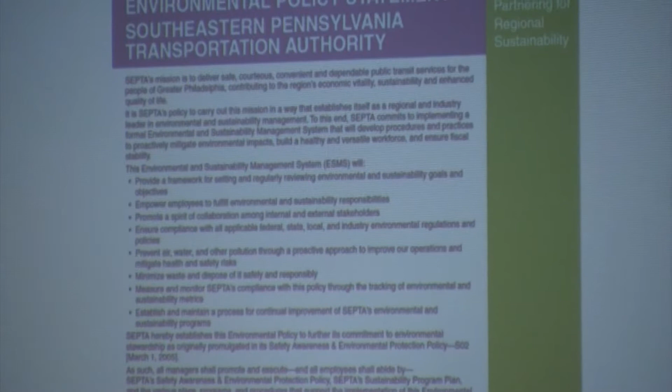So our group, SEPTA, was given the daunting task of replacing Crum Creek in 12 weeks. We have an environmental policy signed by every senior leader in the organization. We want to make sure that we anticipate any environmental issues, we consult, we make sure that any remediation efforts that are necessary are done. And we want to leave the place in any condition post-construction better than it was prior to construction - we want to leave everything and put it back in the way it's supposed to be.

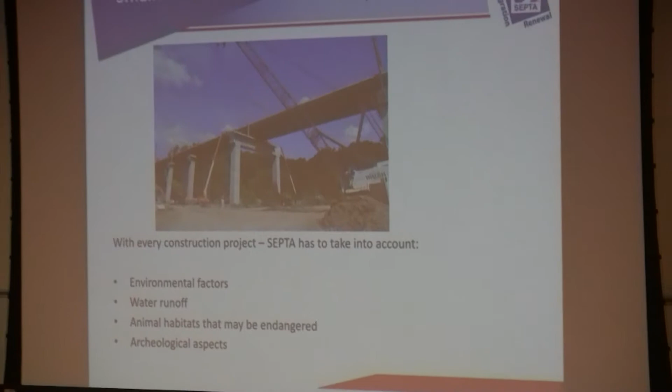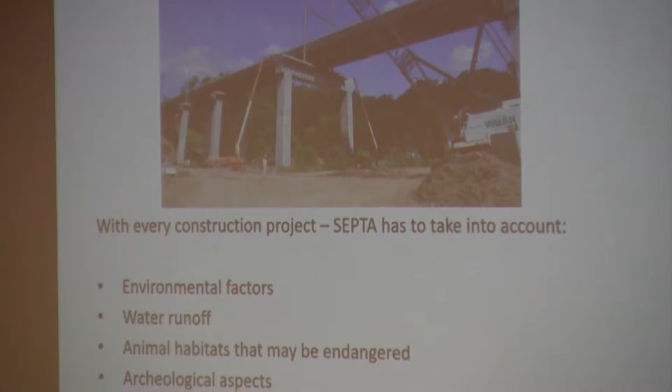So every time we do a construction project, we have to take into account a number of different factors. Tom is going to talk about water and water runoff and environmental factors a little bit longer. Animal habitats and endangered species - anybody think about that when you replace a bridge? And archaeological aspects of what we do.

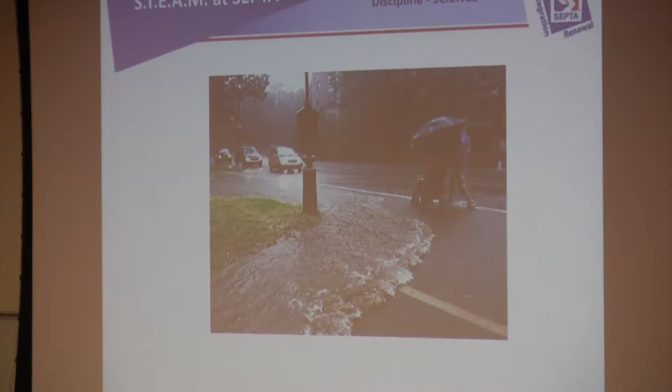Let me see if I get this. So, water runoff is something we all have to consider.

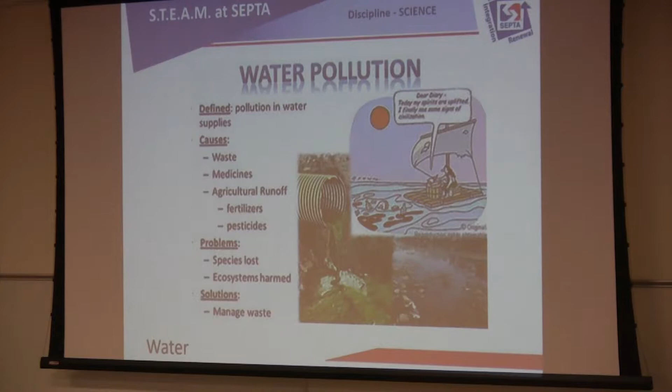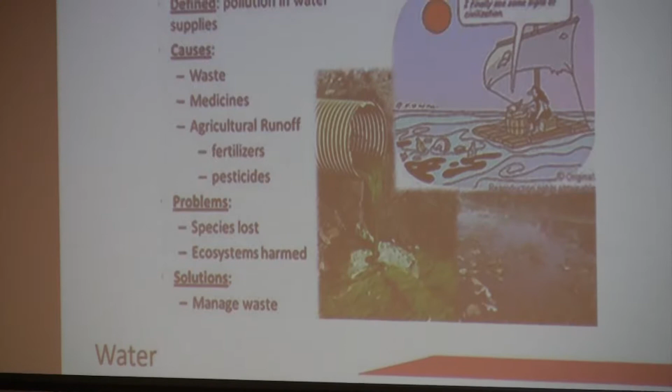Gasoline running into a drain, used motor oil running into a drain, is not going to be very beneficial to the public. It's not going to be very beneficial to the environment. It's not going to help future generations as far as environmental safety is concerned. So we've started to adopt a number of green principles.

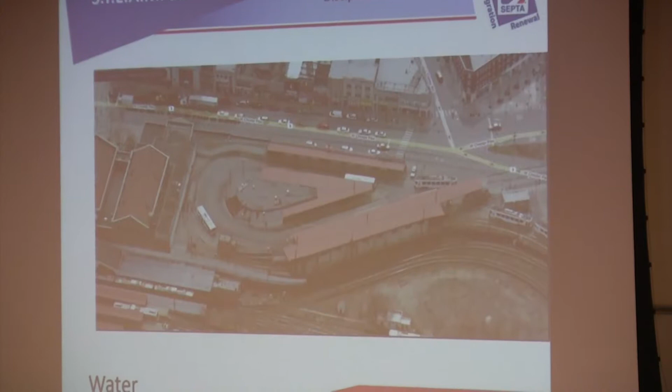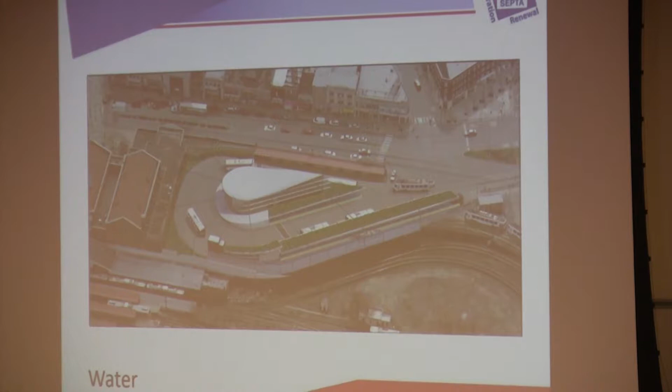So we are using them to control water flow, and also to help clean water, and make sure that the water runoff is limited. That's an easy example of what a green roof is and how you put it together.

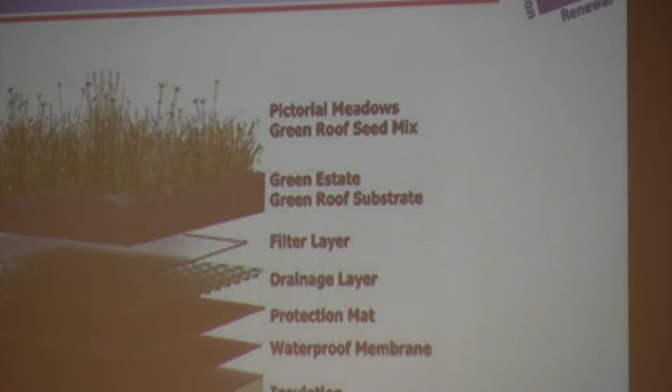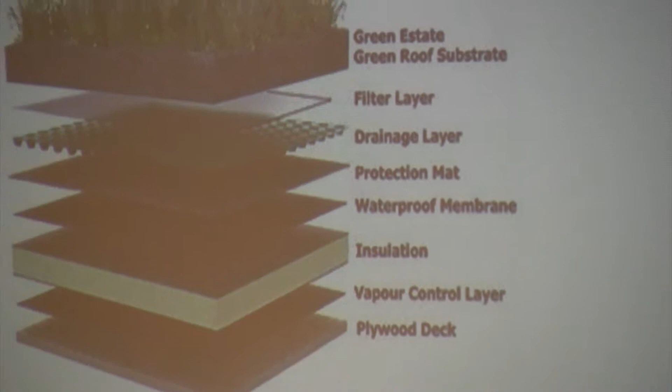There are a number of buildings in the five-county area that a green roof can work on. In Philadelphia alone, there are, I think, something like 50,000 houses. Think about all the row homes and the insulation factors that went into that construction post-World War I - flat roofs, not a lot of insulation. Green roofs are a technology that can actually help cut down energy bills.

And there are actually federal grants going on right now in Philadelphia to add green roofs to a number of places with new construction. There's a lot of gentrification going on in Fishtown and Port Richmond, and a lot of millennials are moving into Philadelphia, into old established neighborhoods. A lot of green roofs are getting put up.

We are trying to use green roofs in as many structures as possible where it's functionally capable, and it's something we continue to consider because of the environment. We want to lessen the environmental impact of our former property post-construction.

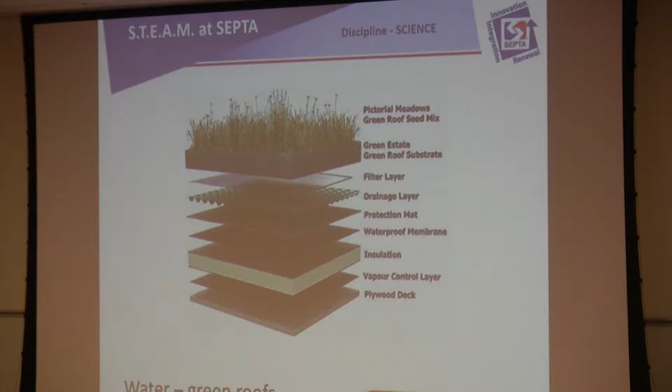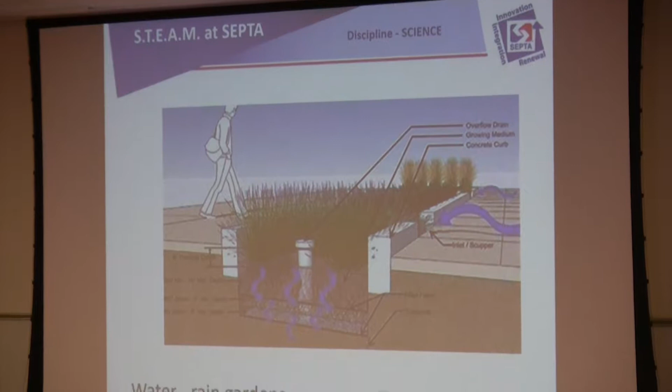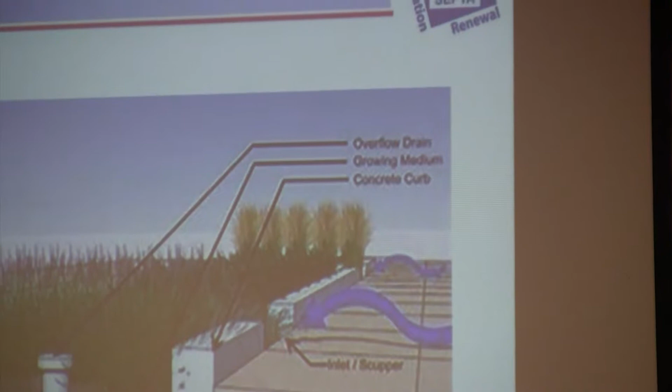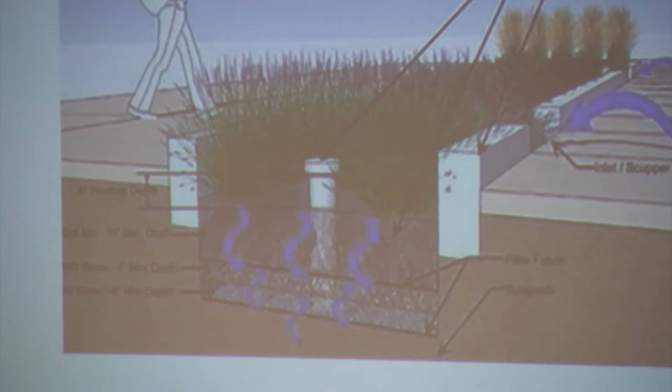Rain gardens - you're going to see a number of spots in our bus loops and other locations that contain rain gardens. This is going to trap water, keep water runoff to a minimum, and also keep runoff and any chemicals to a minimum.

Everybody loves turtles - there's nobody here, I think, that can say anything wrong about turtles. If you've had turtle soup, it really isn't turtles, it's different fish now, but in the old days it was. We had to consider the breeding grounds and the migratory patterns of the red speckled turtle when we did Crum Creek. We had to have environmentalists come in and make sure that our construction did not impact their breeding grounds or migratory paths.

We brought people in, they did the environmental study. We had to make sure that we were living within the boundaries of their habitat, yet at the same time get our work done.

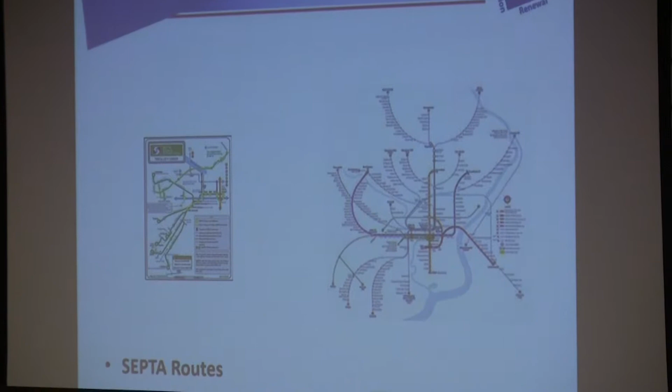We have a new piece of technology that's been rolled out now, and it's going to take us some time to get acclimated to. If you look at our rail path and the trolley path in Delaware, the routes, there's a lot of different pieces there. Up until recently, this was our basic method of payment: tokens, money, and passes, for an estimated 1 million people a day. But where are they going, what are they taking, and what time of day are they riding?

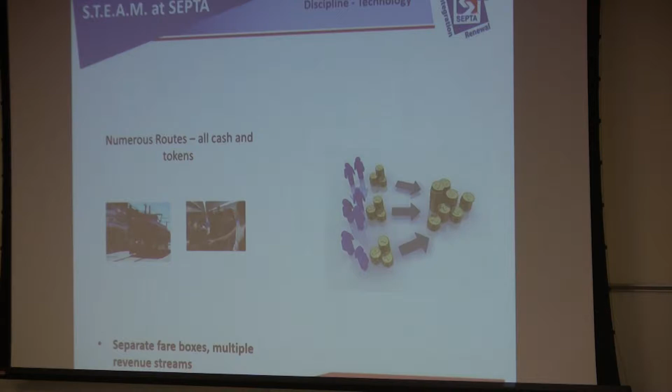We have numerous routes, all cash tokens and fare cards, separate fare boxes, multiple revenue streams. How are we able to capture our customer flow? That's when we get the SEPTA key. SEPTA key is a fare instrument that's loadable - it is a one-stop shop for a number of people to use while they ride the system.

Eventually, it will be on all modes of transportation. Rail's taking a little bit of time to work out, there's also some other pieces we're trying to work out with it, just like any other system you implement, especially because we're multi-mode. So we have the rail, we have the subway - we're not just trying to roll this out on the subway, we're doing buses, trolleys, regional rail, and all the service routes.

Simply by going in and using that and tapping, we're able to get an electronic record of a fare when somebody spends money to go ride. And by the way, the fare's $2.50.

What can you buy for $2.50 these days? You can get a candy bar. You can't get a power bar, they're about $2.99, up to $5 in Wawa. But this is for a loadable fare instrument, $2.50. You're still keeping the price at $2.50. And seniors ride for free.

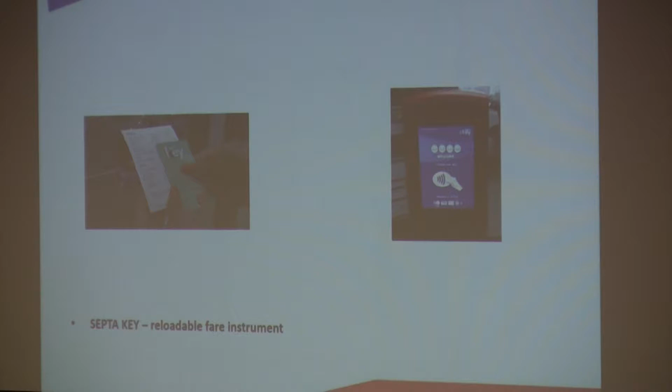We have new ID cards with their pictures on them, so people who are seniors can ride for free.

So advantages: it's an electronic transaction, it gives us a permanent record. Somebody drops a token in, it's not a permanent record. The token goes in, we don't know who the token went in by, we don't know what time of day it went in. All we know is when we empty the box, it's there.

The single fare instrument, we can get there. We may never get there because there's always going to be people who have to use money. There are going to be people who are unbanked, who do not have banking accounts. We're trying to work through that situation now.

The fares are calculated automatically, though, so we know automatically when you switch modes, when you transfer, we don't charge you $2.50 twice.

Trips by type, trips by individual. Seniors have their own cards, and we have special and federal programs. People with disabilities, they have their own cards.

So it provides answers. How many people are really riding? We'll estimate 1 million people a day, but I can't guarantee you it's 1 million people a day. And what routes are they riding? And what time of day? Where are they going?

We had a conversation real quick this morning about this campus and the possibility of a connection to your other campuses. There's evidently a bus from 69th Street that comes here but does not interconnect between the campuses.

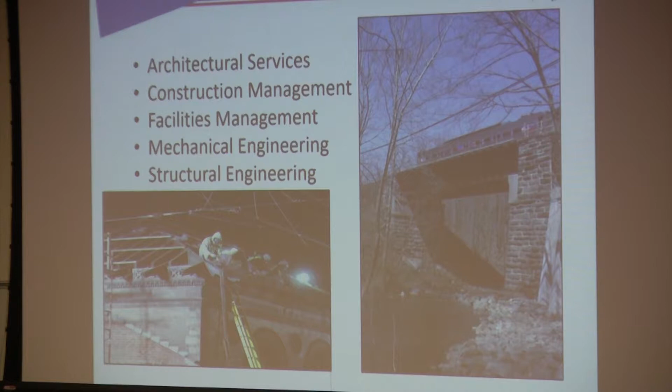Facilities management - like I said, we have a lot of buildings, a lot of shops, a lot of depots that have their own facilities, essentially their own workshops, plus all of our stations, all of our elevators and escalators. Those all fall under the Bridges and Buildings Department. Our mechanical engineering group and also our structural engineering group all reside within our Bridges and Buildings Department.

Under our civil group, like I said, they handle site layout. Whenever we're designing a new station or retrofitting an existing property, our civil engineers come in and re-lay out the property to make the best use of space. They handle all of our stormwater management on the system, which is a big deal. As Dan mentioned before, stormwater management is a huge issue, not just for SEPTA, but for the entire region, so our civil engineers really lead the front in dealing with those issues.

Third-party coordination - because we're such a vast organization, we have people, companies, other entities that want to do work on our property or adjacent to our property. All that work needs to be coordinated to make sure that they're not impacting service, they can still get their work done, and it's all done in a safe manner. So all that really goes to our civil group.

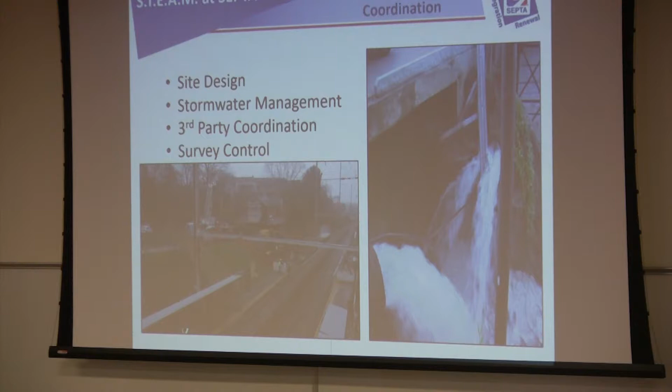And lastly, survey control. We essentially have our own survey crew, and we have to go out and lay out benchmarks, stake out property lines. We can do a lot of those tasks in-house.

Our communications and signals group is responsible for our entire fiber optic network. We have a completely independent fiber optic network that runs through all of our outlying locations, all of our stations, all of our yards, and they manage and oversee that. They're also responsible for all the communication systems in all the equipment themselves, so trains get the proper signals and can proceed in a safe manner.

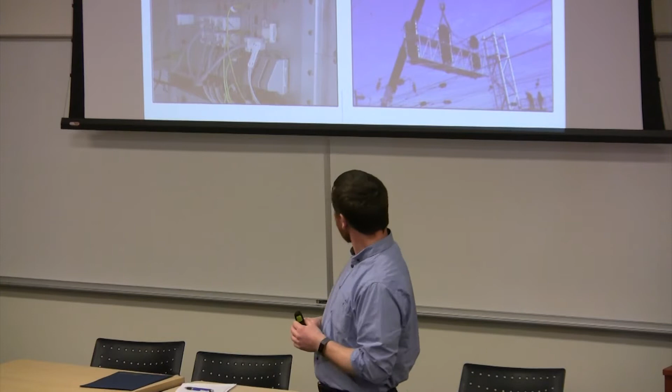All that's handled by our communications and signals group. If anyone's been at a passenger station, they handle all of our audio and visual announcements, all our display boards, equipment testing, and third-party support all falls under our communications and signals group.

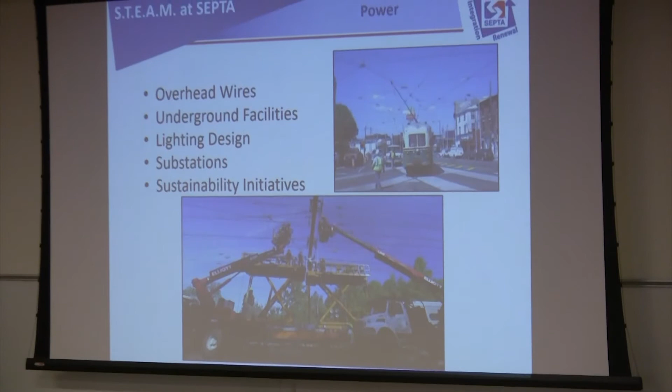Our power department - if anyone's ever ridden on a train, ridden a trolley, ridden the subway downtown, they all need power to operate. That's what the power department is, my department. We're responsible for getting all the power, medium and low voltage, out to our facilities and equipment. We're responsible for all of our lighting at our stations, our overhead wires, and our underground facilities.

Something a lot of people don't know in the city, back a long time ago, we had trolley routes on pretty much every city street, and we still have a lot of those facilities in the ground now. Even though we're not actually running service, we still have active high voltage cables in the ground. So whenever the city is digging up the street, repaving, or putting in an ADA accessible crosswalk, they need to coordinate with us to make sure that work can be done in a safe manner.

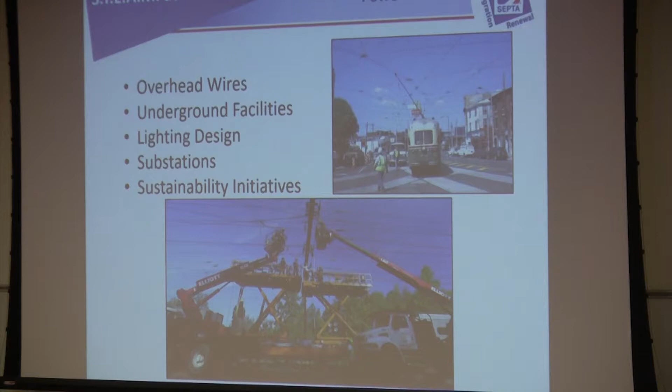Also, our power usage - we're PECO's largest customer for the entire region, because everything we do requires power. So if we lose PECO, we're pretty much shut down. And then also, something that kind of gets lost in the shuffle sometimes are our sustainability initiatives.

We really spend a lot of time and effort looking to see if there's a better way of doing something. Are there greener technologies we can be incorporating, whether it's solar or wind? We're doing a lot with regenerative braking, where we're capturing energy from braking trains and putting it back out onto the system. So yes, it's bottom line for SEPTA, which is good - we pass that on to our riders - but it's really the right thing to do. As an engineer, it's our responsibility to look out for the environment and do what's best, so it's nice that we have engineers specifically focused on those responsibilities.

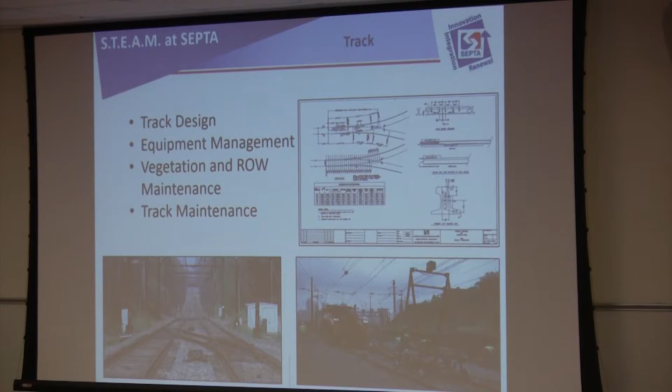And then lastly, of the main engineering groups, our track department - so much math, that's why I don't do it. But pretty much any of the track that's out there, all the design work, all the renewal, all the rehab, all that has to be designed to very, very strict tolerances.

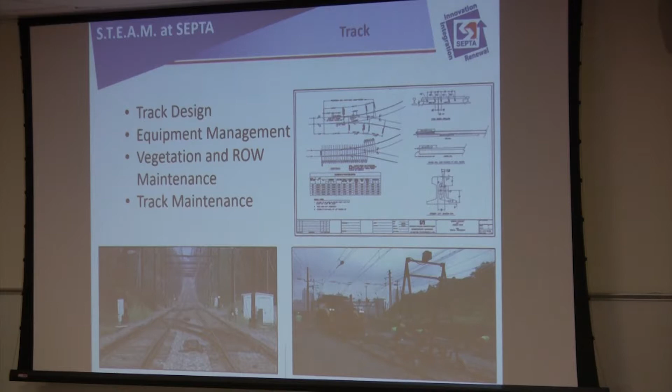There are federal requirements, especially on the railroad, that they have to meet. So our track engineers really spend a lot of time and effort making sure that everything's in compliance and done properly. Another big one is right-of-way and vegetative maintenance.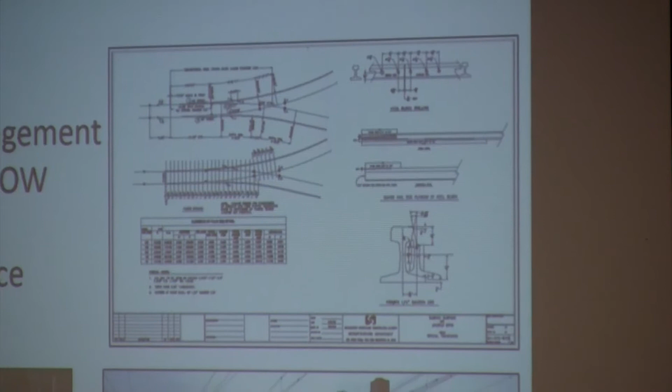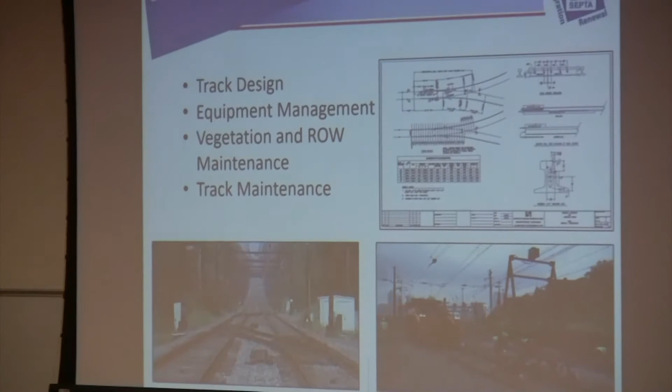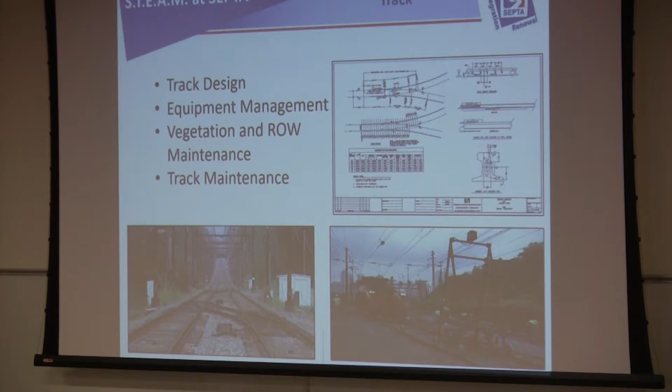Most of our facilities, again, out on the railroad and trolley lines - the 100, 101, 102 trolley lines to Sharon Hill - in most cases, they're vegetated rights-of-way. So we have a continuous problem with trees coming down, getting into wires, impacting service. Like in the winter when we've had some of these ice storms, you see trees out when you're driving with ice in the branches blocking the roads - we deal with that on almost a daily basis. So in the winter we have crews that pretty much just go around knocking ice or cutting down branches, just so we can maintain some level of service.

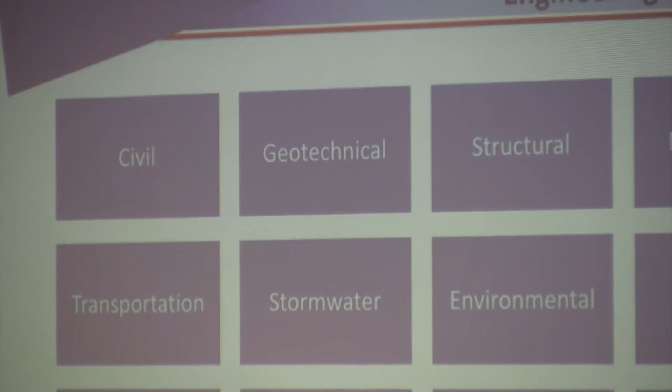So this is just a short list of a lot of the different types of engineers that we employ here. We're not going to read them all to you, but what's really great about SEPTA and engineering is there's a place for everyone. We do so many different things, so many varied disciplines, that we have engineers of all these types on staff, which is great.

So what do we do? We're project designers, like I talked about. We're technical resources - as I said, we fall under engineering, maintenance, and construction. So our engineering staff is really a technical resource for our construction and maintenance forces, making sure we're answering questions, solving problems that they have, and really just being an asset to the organization.

So I'm going to go through a couple examples of projects here, just some of the varied things that we do and that we're responsible for.

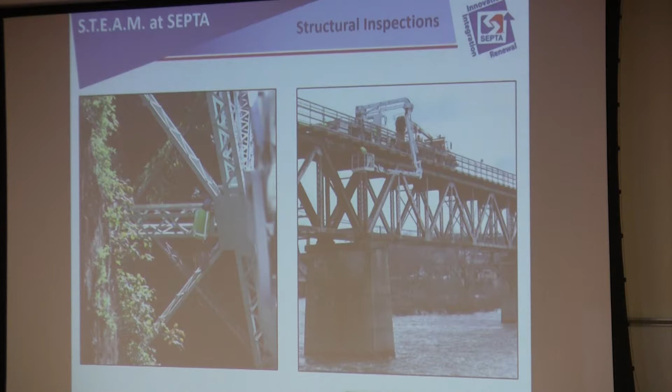This photo is not as dark on this screen, but again, this is the concrete bridge that Dan mentioned.

On the left-hand side is the original bridge built in the late 1800s. On the right-hand side is the new precast concrete bridge that was built. As Dan said, it was built adjacent to the old bridge so we could maintain service. Then under a scheduled outage where we had to suspend service, they demolished the existing bridge and slid the new bridge in. Like Dan mentioned, you can check it out on YouTube, they actually did a time lapse of it. It went super quick, but it's phenomenal to see from an engineering standpoint.

Here is a unique solution to a very specific problem. Normally, like PennDOT or the city, they'd just take the bridge out, kill it for a year and a half, and people can go around. We don't really have that luxury.

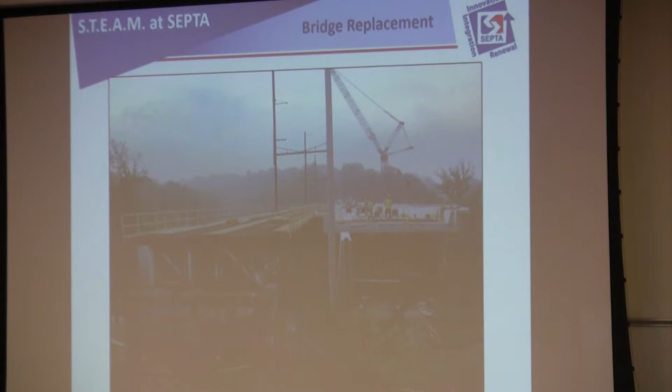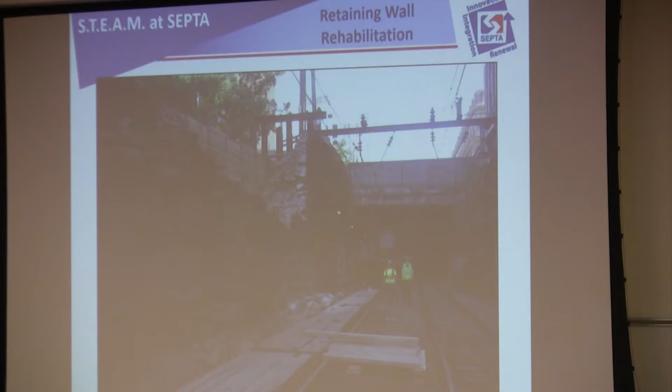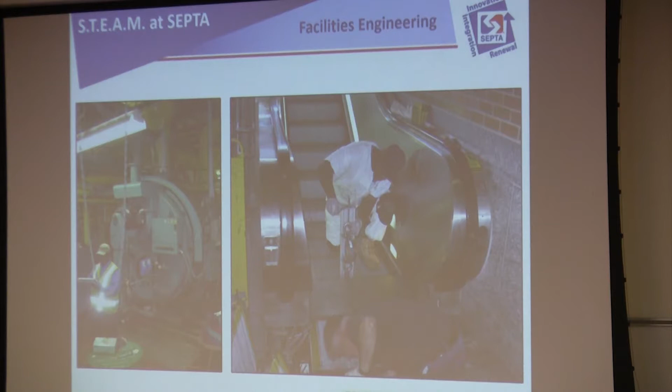Facilities engineering, like I talked about, all of our facilities have generators, boilers, mechanical rooms, elevators, escalators. It's a massive amount of facilities that our mechanical engineers are actively involved in, whether it's designing new equipment to replace old, outdated equipment, or working with our maintenance forces to maintain the equipment.

Tunnel construction. This is Malvern Station on the regional rail line, the Paoli-Thorndale line. We bored a new pedestrian tunnel through a railroad embankment while you had 4 tracks of Amtrak territory, active high-speed rail above it. How do you do that? Very carefully and slowly, but there is a way. If anyone's ever been out there, you'll see what I'm talking about. It's my home station.

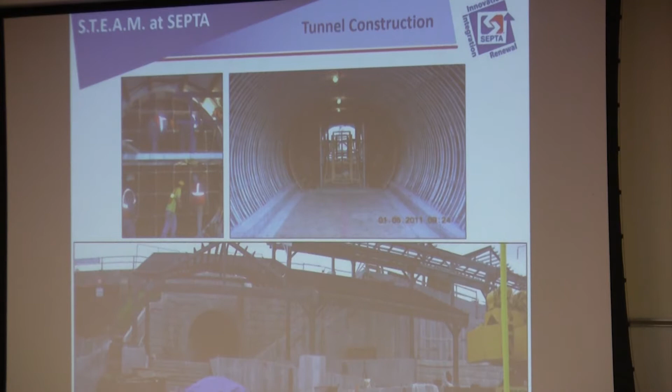Like we talked about, this was done in probably a 3-day weekend, probably either Memorial Day or Labor Day, where the precast concrete panels were on tractor trailers, ready to go. After the last train on Friday night, we would cut rail, remove the sections, dig it all out. The footers in the stream bank would have already been installed ahead of time, and then the crane just came in and set the sections, filled it back in, put the track panels back in, welded it back up, and we were back up running service probably Tuesday morning.

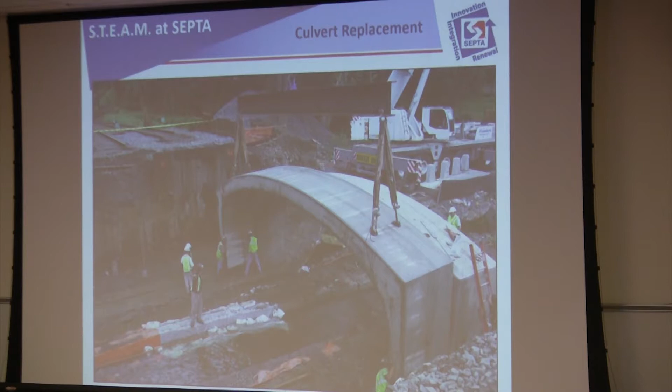Rail's usually the low point. We have swales on either side. That's where the water was accumulating because everything slopes down to us. Until that water receded, they were just stuck taking photos.

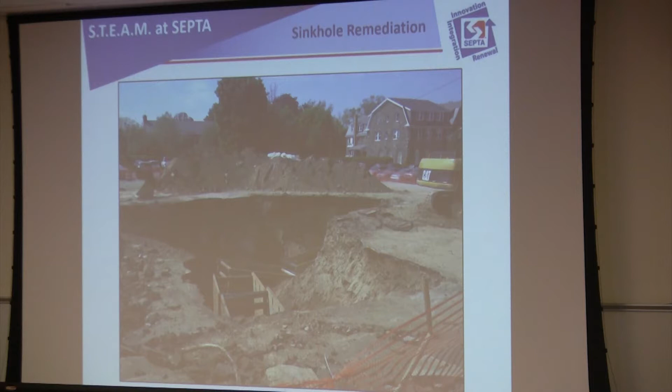And put the parking lot back together. The whole time this is happening, we're impacting customers. Our parking lots aren't big enough anyway to take out probably half or 3/4 of it while we fix this over a week or two span. It's not a luxury we have, so, but sometimes you have to do it.

Substation construction, we're essentially a utility. The amount of power we use is just bananas. So a lot of our equipment is, again, like David said, from the late 1800s, early 1900s. We actually have to fabricate a lot of parts from scratch by hand because it's no longer made. It's probably older than we are. So we're really going through now and overhauling a lot of our equipment, getting new state-of-the-art modern equipment. So with that comes reliability and redundancy.

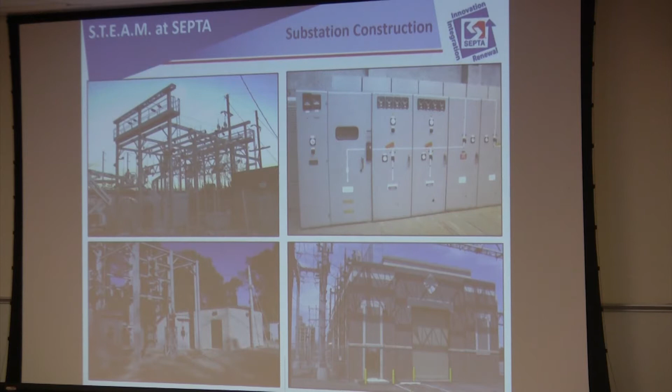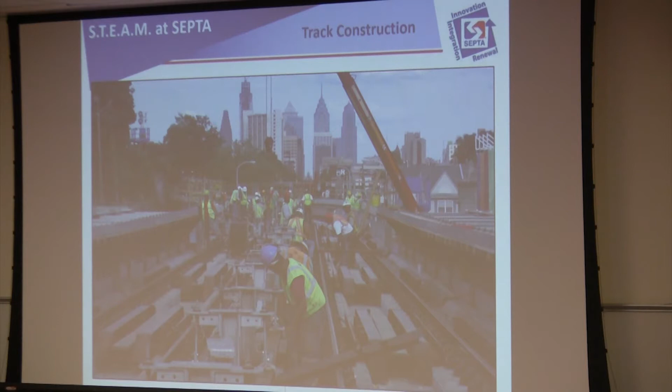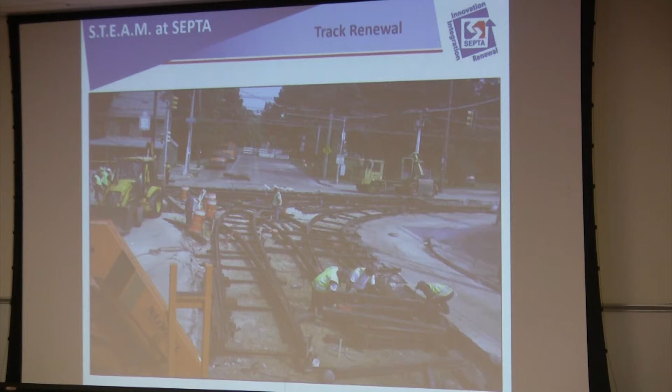And then the last two, long-range planning. Everyone thinks, oh yeah, we just sit at a computer and draw stuff. We've already been in meetings. We've got 5, 10, 15, we're thinking 20 years out for a lot of our projects. So King of Prussia Rail Extension, if anyone's familiar with that, kingofprussiarail.com, something like that, check it out, it's really cool. Paoli Transportation Center down the city, a new station out of Villanova.

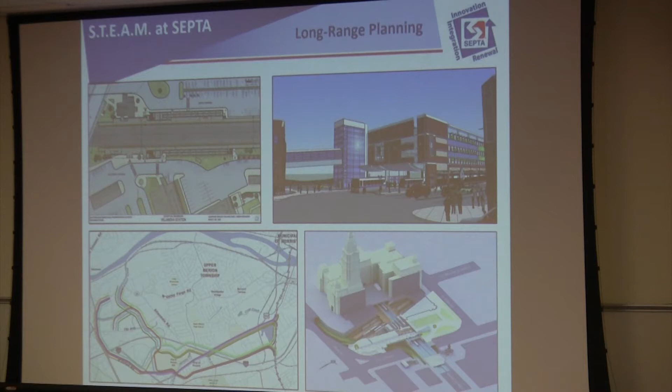These are all massive projects that require a ton of money, but a lot of planning. But in the end, they're good for our riders, and good for the communities that they're in.

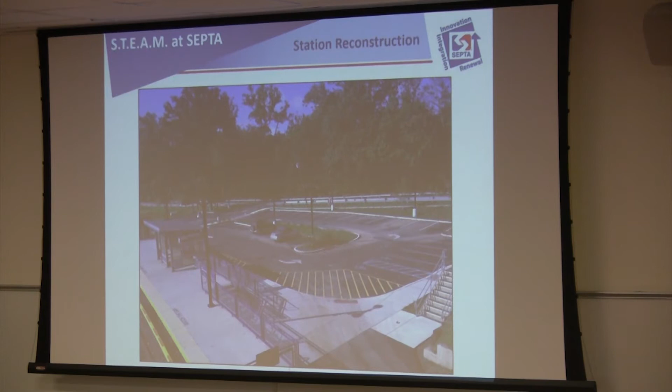Lastly, station reconstruction. If anyone has ever been out to Ardmore Avenue Station on the Norristown High Speed Line, it's right next to Merion Golf Course, where the US Open was in 2013. This station, from design to construction, was less than 2 years, once the golf course got determined. We increased parking, landscaping, added stormwater features, new lighting, ADA accessibility, and a complete overhaul of the station, completely built in-house. If anyone's ever been out there, check it out. I'm actually the engineer of record on this. I signed and sealed these drawings myself, so I'm kind of proud of it.

All right, that's all I got.

Thank you, Tyler. I remember that shot you took at me. Yeah, surprised to hear a little bit. Yes. So we've got a couple of minutes left, and I want to get through this as quickly as possible. Not that it doesn't deserve attention. Where are my artists in the room?

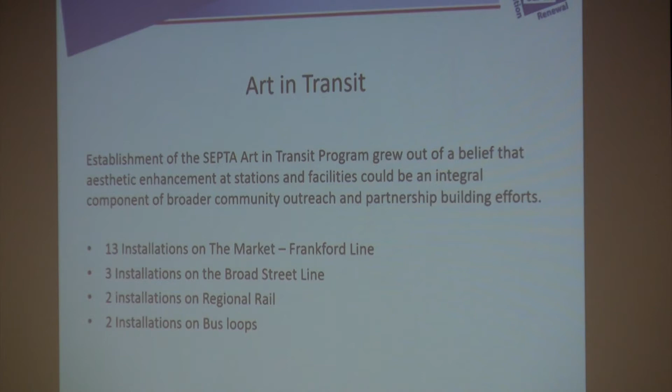The program just started. If you go and look at our website, there's live music, buskers, the Philadelphia Orchestra, everything from a middle school play or choral group, all the way through members of the Philadelphia Orchestra playing during rush hour, in the morning or in the evening.

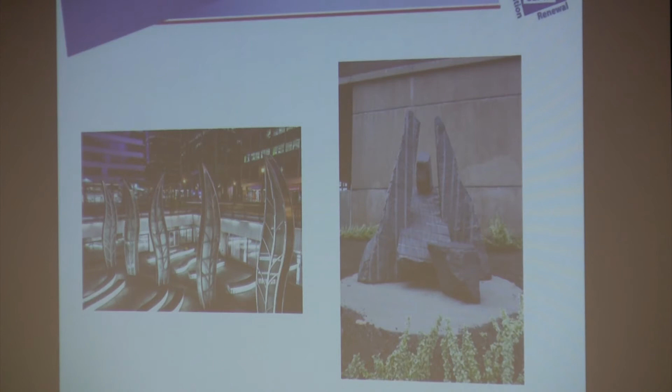This is Suburban Station at night, an open courtyard with flames. And this is a rock sculpture up at the Norristown Transportation Center. This is an installation out in West Philadelphia that an artist came up with - I think it's really neat. It's flowers and flower petals, and it actually covers a quarter of the block. It beautified the neighborhood.

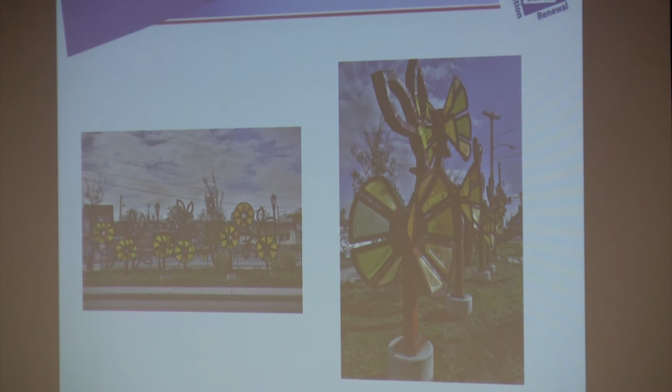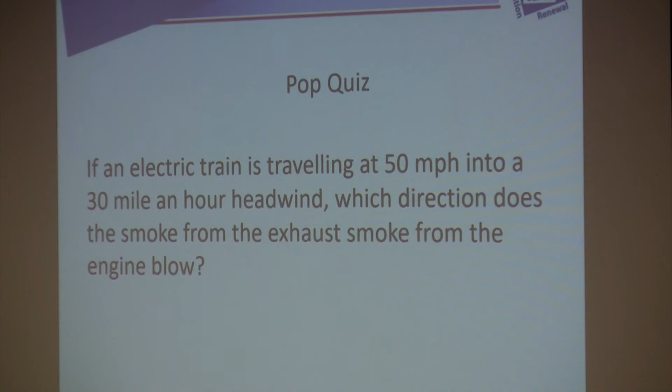See, I got professors in the room. Right, it's electric. There is no exhaust. Okay?

Everything we do involves math and algorithms. Teddy Roosevelt said a thorough knowledge of algorithms is worth more than a college education. Algorithms can predict amazing things. They can predict scary things.

We have an actuary who works with me at SEPTA. He looks at our workforce, the years we were born, our health, and all these other pieces. He boils it down into big data and can literally tell you roughly when you're going to die. Now, I don't talk to him about that, but I know if he worked an algorithm out on me, he'd probably be pretty efficient at it.

The big thing that worries me, though, is the current choice for problem-solving algorithm commonly used nowadays: a set of rules a machine, especially a computer, follows to achieve a particular goal. We are doing studies now using algorithms.

We're crunching big data, looking at moving transportation around, and how we can be more efficient with our schedule. We're looking at the small windows we have in our train schedules, because we share our tracks with CSX and Amtrak. It's not like a plane circling the airport where somebody can just pull in line. If we miss our window, we're 20 minutes off, and we throw everybody out of whack.

Anybody here been on a SEPTA train and pulled into a siding while an Amtrak train goes flying by? That's because the Amtrak train's off schedule and they have priority rights. They can make us pull over—it's their track.

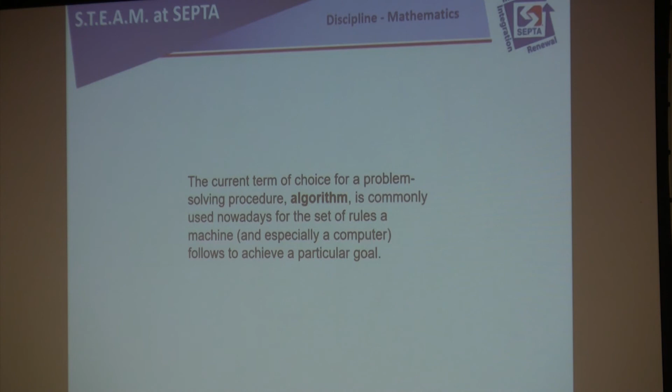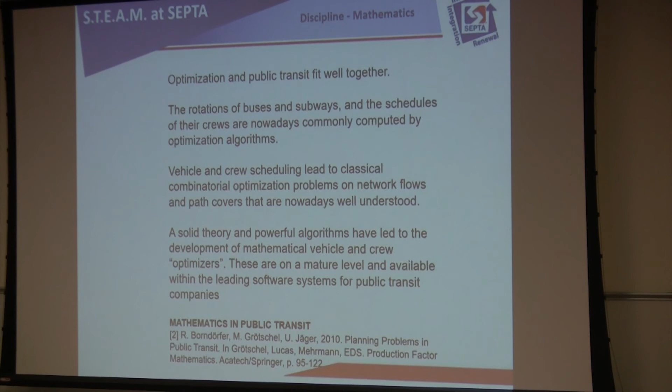Optimization and public transportation fit well together. This was a German study—I know, because I'm German. As they looked at efficiencies, they were able to do a number of things with software to move fleets and improve delivery of services.

Our bus operators—there are 6,000 of them—the most important part of their job: 20% is operating the vehicle, 80% of their job is customer service. If you cannot interact with individuals, you can't work for SEPTA. That's what I tell everybody.